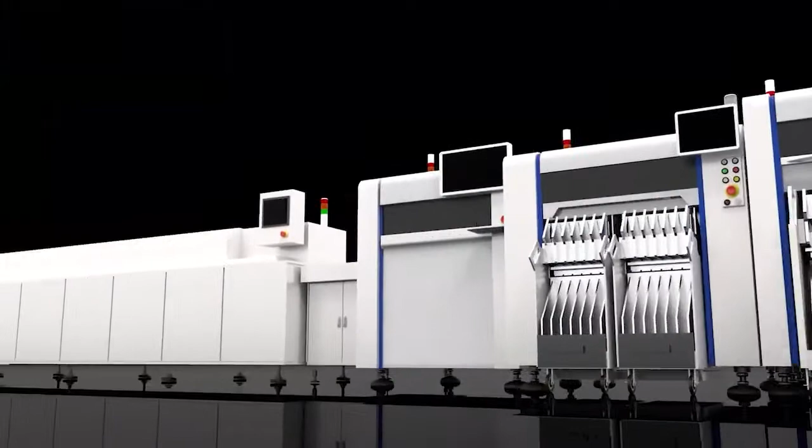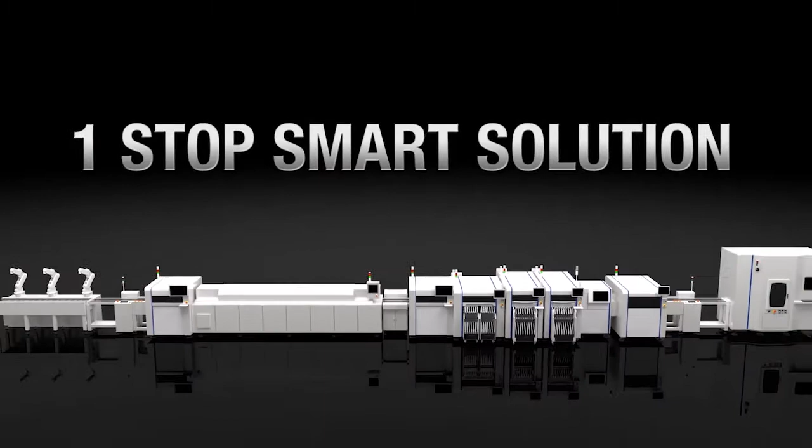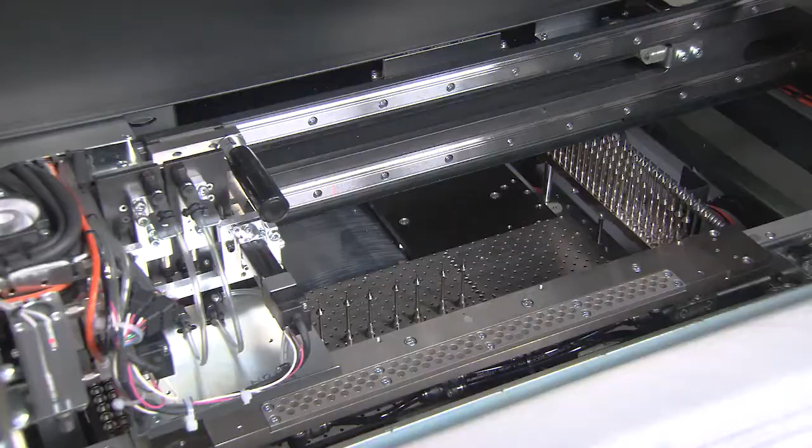YAMAHA One-Stop Smart Solution. This is a concept where Yamaha, as one brand, develops and manufactures products linked to smart, smooth, and sophisticated production lines, incorporating cutting-edge solution technology. This one-stop smart solution is the first concept to integrate the two conditions of all-around development and manufacturing know-how with the major equipment needed for everything in SMT, from printers to mounters to inspection machines, in one complete cycle, along with high performance in each and every machine.

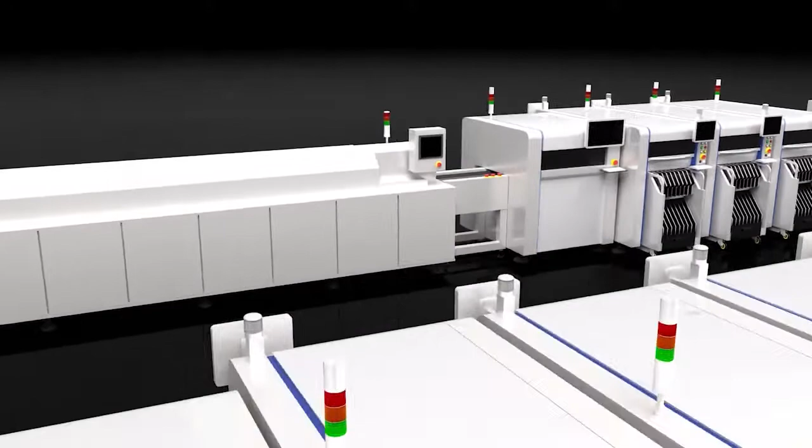Here we introduce you to some typical machines from among the broad Yamaha lineup, fully loaded with intelligent solutions, including the latest technology.

After component refills, we now look at the solder printing process with the Yamaha Premium Printer YSP10. The YSP10 is a high-end printer that delivers high-speed printing on the world's fastest level. The best feature of the YSP10 is fully automated setup changeovers that usually take the most time and trouble in the printing process. To achieve this, we designed and developed 3 new functions.

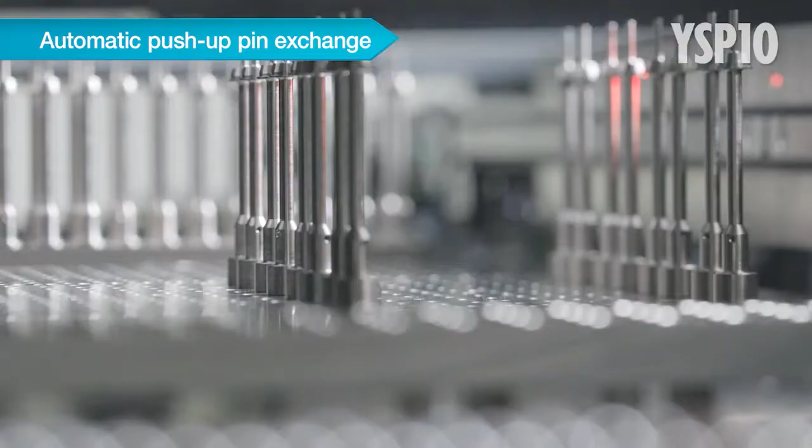Automatic push-up pin exchange. 2 pickup heads speedily place push-up pins at the optimal position.

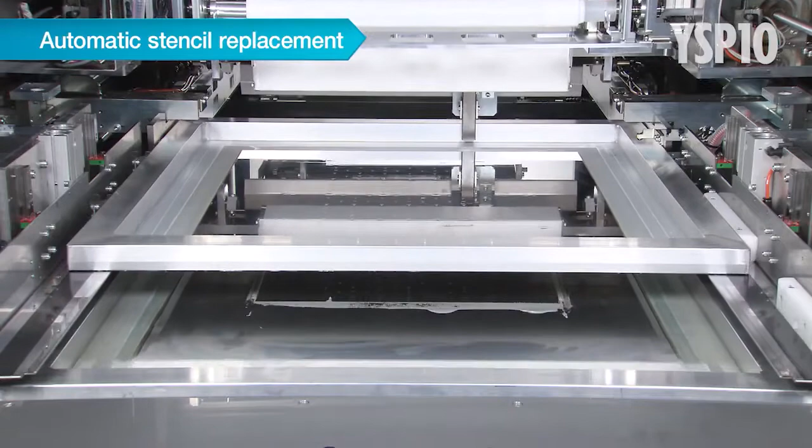Automatic stencil replacement. After presetting the stencil needed for the next production run, the machine automatically replaces the stencil.

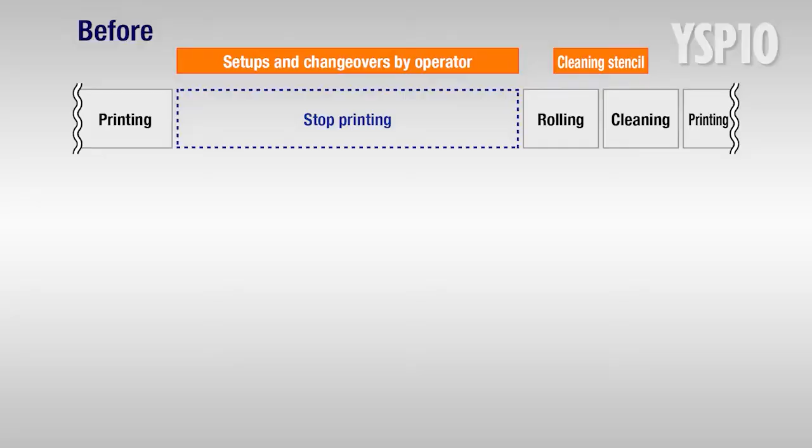Automatic solder transfer. This function automatically scrapes up solder remaining on the used stencil and places it on the new stencil after replacement. These 3 functions, fully automating the setup changeover process, free the operator from this task and shrink the setup time to about 1/3 the time it used to take. The YSP10 is a high-end printer with fully automated setup changeovers, yet also achieves operation to high specs.

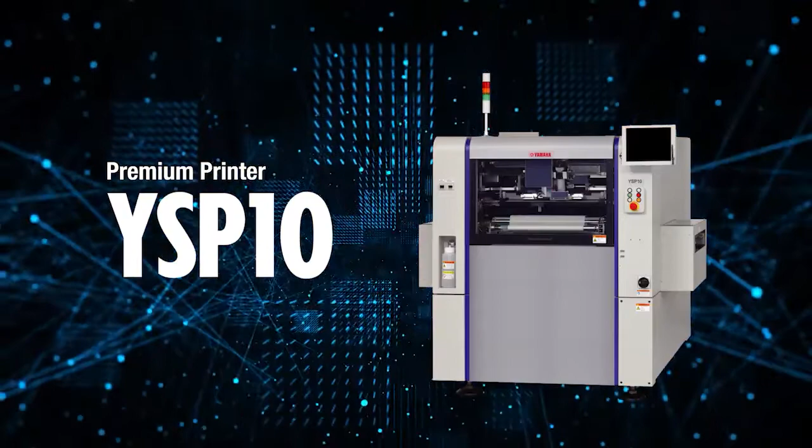After printing, operation proceeds to print inspections. The YSi-SP, a 3D high-speed solder paste inspection machine.

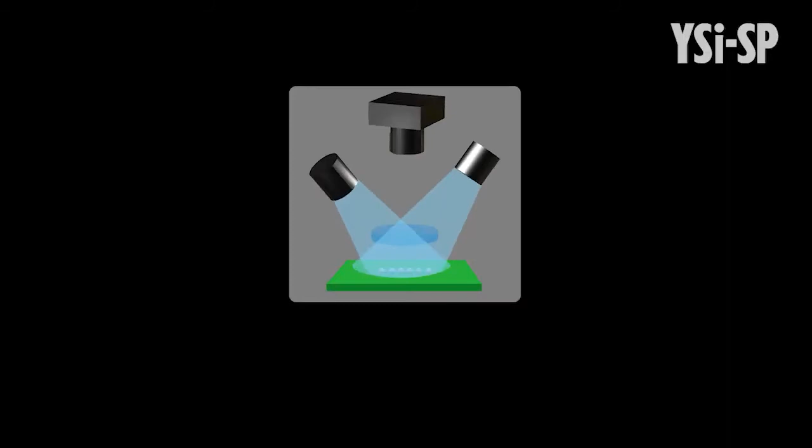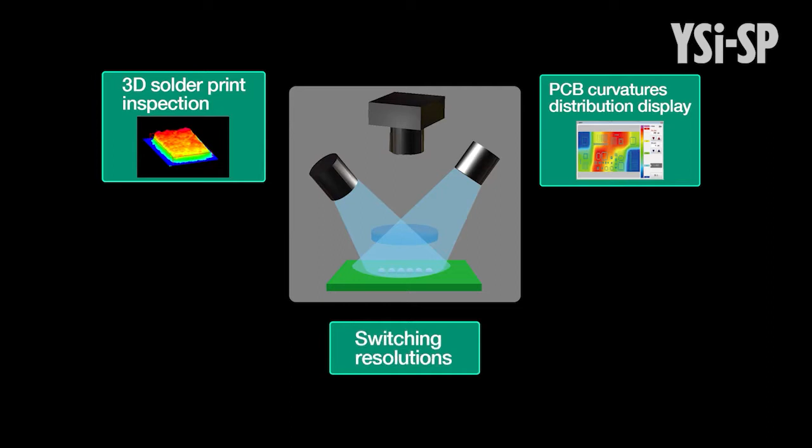The YSi-SP is a versatile device that makes all types of inspections on one unit by using a unique in-house measurement algorithm for high-accuracy inspections, combining both 3D and 2D, as well as super high-resolution technology to switch the machine image resolution. It also handles 3D bonding inspections by way of a data link-up with the YSD Yamaha dispenser,

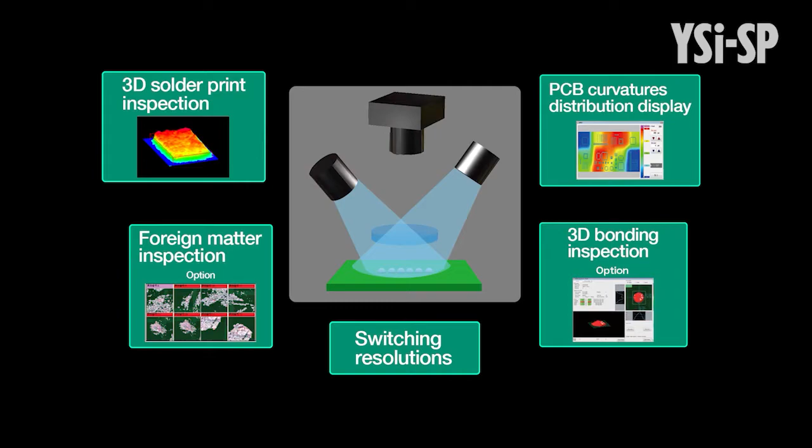and foreign matter inspections as an option. By correctly checking the bond or solder state before component mounting, the YSi-SP helps create a defect-free production line.

Next, let's take a look at the component mounting process. Yamaha mounters are available in a lineup with a host of unique features, allowing you to select the ideal machine to match a wide range of production sites and situations.

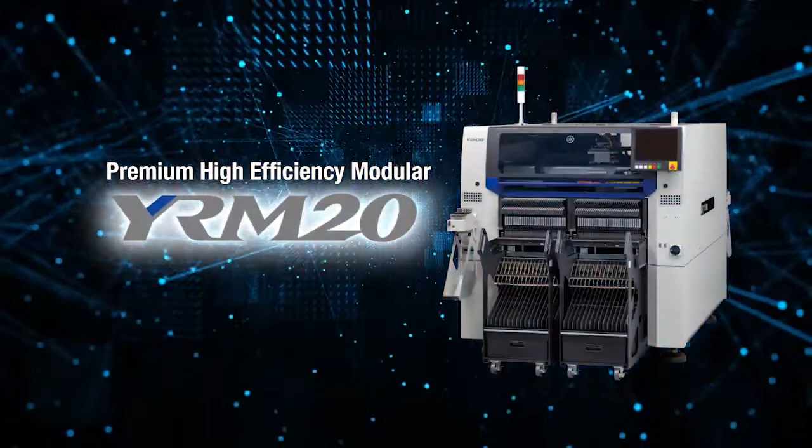Among these, the new premium high-efficiency modular YRM20 serves as the core of the next-generation product lineup. This is an innovative high-speed all-around mounter that represents a new generation fusion of all Yamaha technology. 3 types of heads are available in the YRM20 and are freely usable in all types of combinations.

The super high-speed RM head can produce 115,000 CPH, which is the world's highest level. Combining it with the new type high-speed feeder will achieve unbeatable productivity. Even though it is a rotary head, it is still extremely versatile, handling components ranging from ultra-tiny 0201 mm chips to maximum 12 mm square.

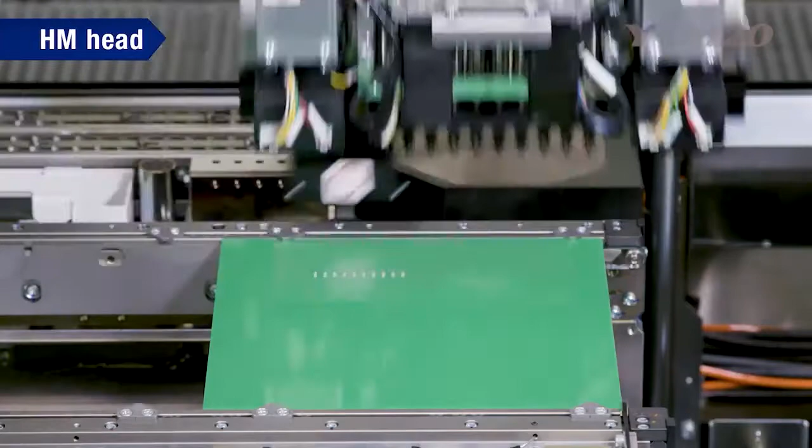The high-speed multi-HM inline head achieves the one-head solution at a very high level. It achieves high-speed mounting of 98,000 CPH, yet handles component sizes from tiny 0201 mm chips on up to sizes of 55 by 100 mm.

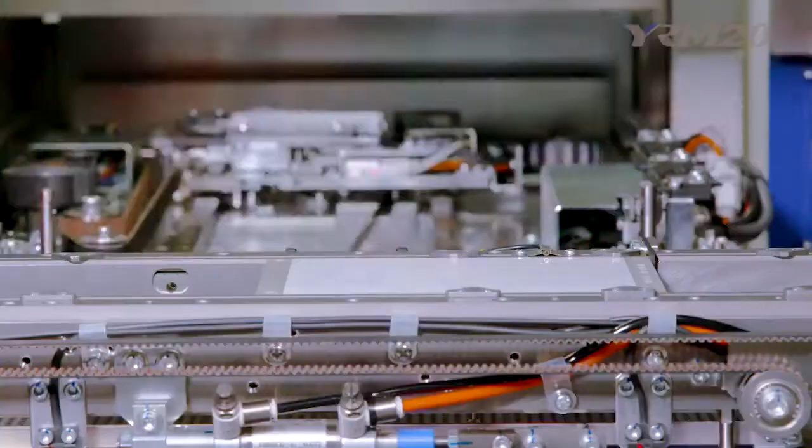The inline FM head for odd-shaped components emphasizes component compatibility even further, proving ideal for tall components and other large components.

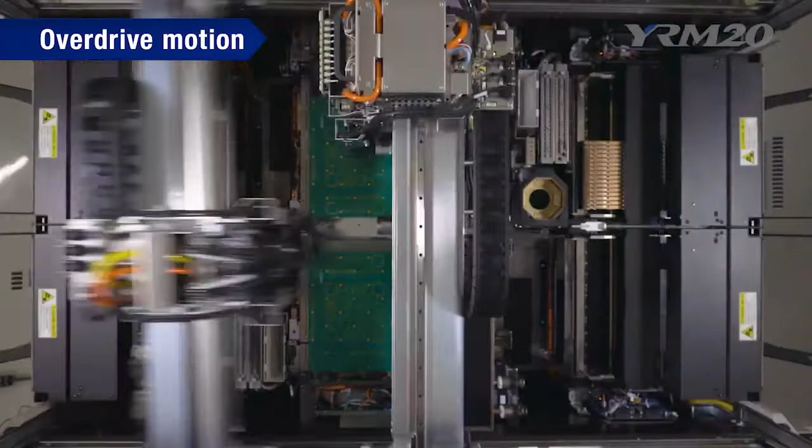Also, overdrive motion that inherits the Sigma series technology has reduced restrictions when 2 opposing heads enter each other's space, improving actual productivity.

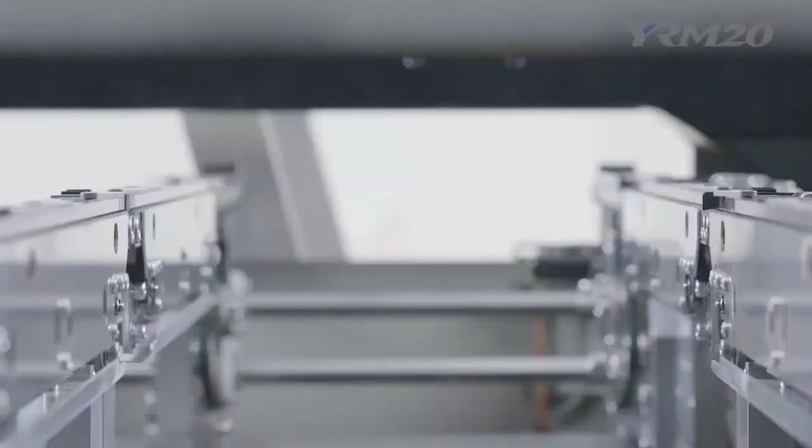Use of a new type of component recognition camera has boosted recognition speed and quality to a whole new level. A newly designed X-beam reduces warping from thermal stress to a minimum to achieve high accuracy mounting to plus or minus 25 micrometers. The newly designed conveyor optimizes the layout and delivers high-speed conveying.

Time needed for PCB changeovers is drastically reduced. As a result, the effective production takt time has been greatly improved. It can now also handle a broader range of PCB to a maximum size of 510 millimeters in width.

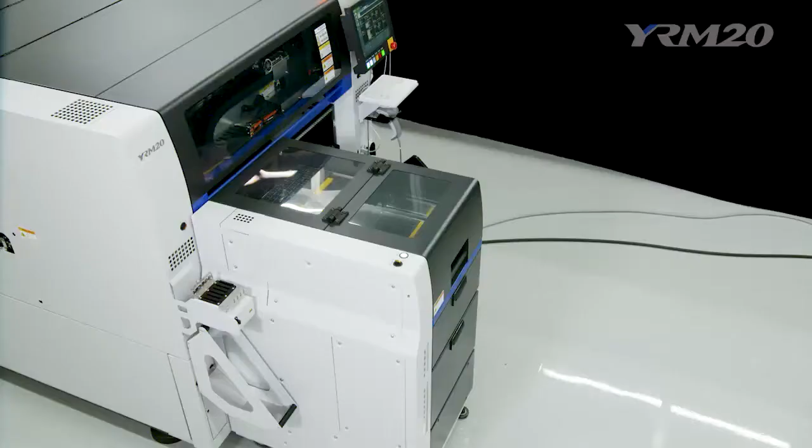Moreover, the recently developed non-stop automatic tray supplier eATS30 supports YRM20 by speedy non-stop supply of trays. It provides non-stop supply of tray components in pallet or magazine units.

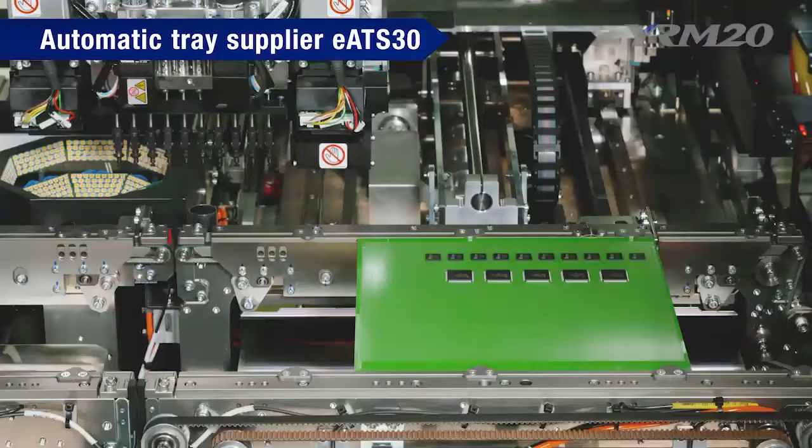Components on trays can now be efficiently supplied without having to stop production. This means fast tray replacement and minimal loss of production time.

An innovative next-generation mounter that integrates all of Yamaha technology with a completely new platform. The new premium high-efficiency modular YRM20.

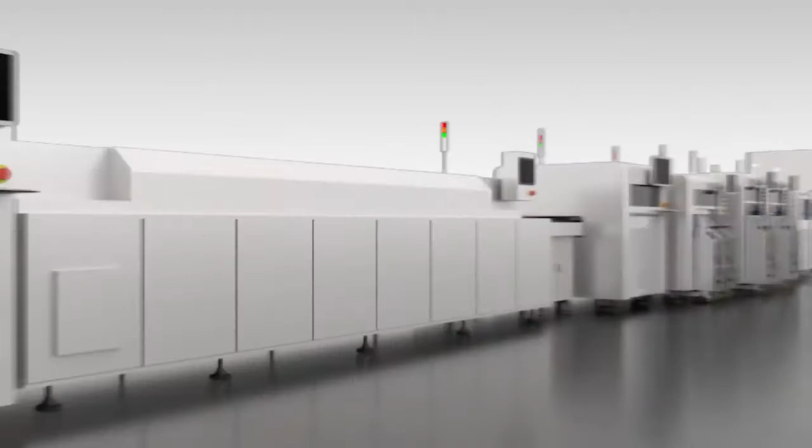Next is the YSi-V 3D Hybrid Optical Inspection System.

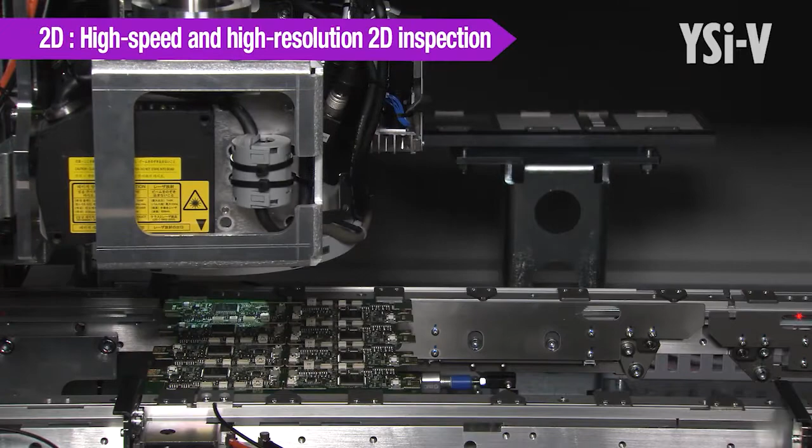This high-accuracy inspection device can make 3 types of inspections: 2D and 3D inspections, and 4-angle camera inspections, all by 1 unit. High-speed, high-resolution 2D optical inspections via an industrial-grade high-resolution camera and high-speed image processing. Optical phase shift 3D inspections detect height and tilted surfaces. The 4-angle camera detects tilt angles which are not visible from directly above.

The YSi-V achieves the fastest level of inspection speed in the industry, along with accurate quality judgments by a combination of many functions and features. These devices and concepts all work together to provide Yamaha's one-stop smart solution line, where all of these high-spec machines interact with each other to a high degree without a black box, integrated by the IoT M2M integration system, Intelligent Factory.

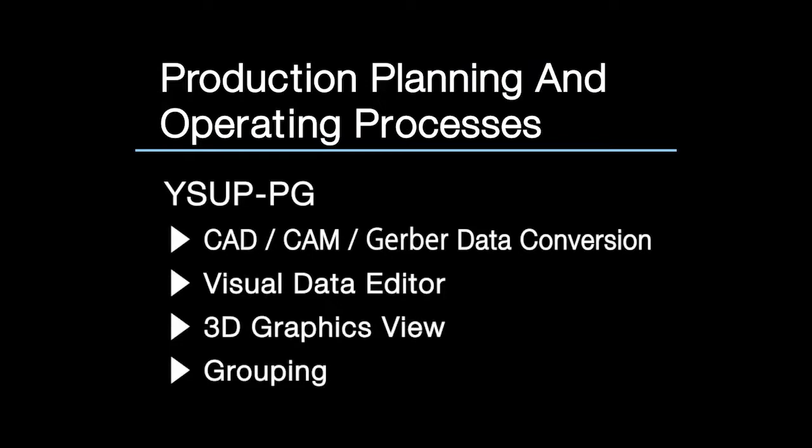Now let's take a look at its software. First, we have the software YSUP-PG that supports production planning and operating processes. In YSUP-PG, the user interface was completely redesigned and recreated, much easier to use and operate, and drastically boosts work efficiency.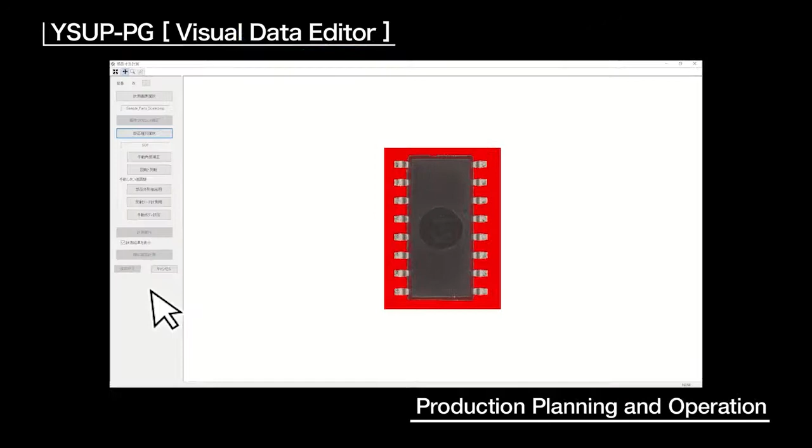CAD, CAM, Gerber data conversion. It not only converts ASCII-type CAD data, but also converts standard CAM data to component mounting data. Visual Data Editor displays images created from standard CAM data and Gerber data so that component mounting positions and mounting angles can be confirmed in advance. It can also automatically measure component dimensions from the actual component image.

The 3D graphics view gives the operator an accurate look at possible component interference, component mounting coordinates, and other important items to further enhance the quality of the PCB data.

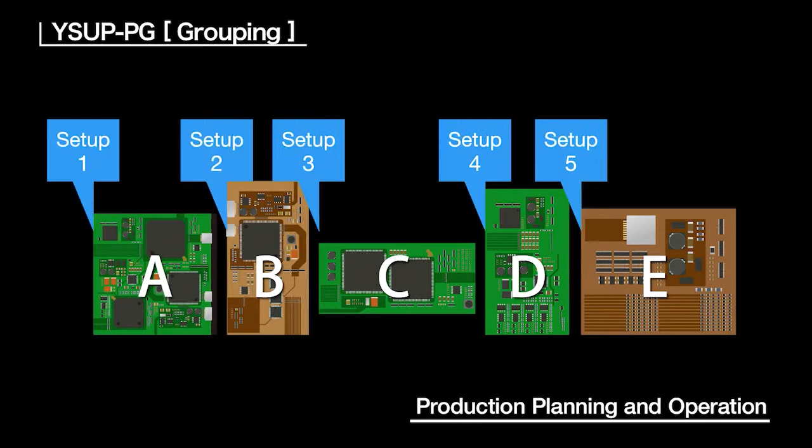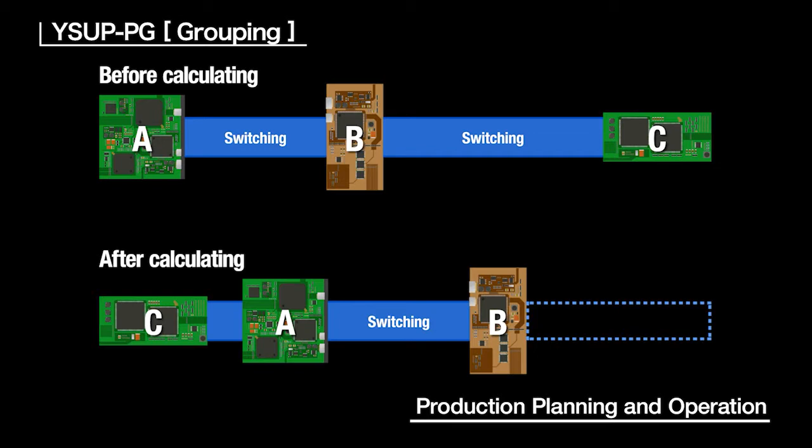Grouping: this software automatically calculates combinations of products with many common component combinations in a production line and sets a no-waste production priority. In addition, taking into consideration the switching time for temperature profile change in the reflow process, the most efficient order can be calculated. This software minimizes setup and changeover time, along with standby time, to boost productivity and task efficiency. It also supports dual-lane production.

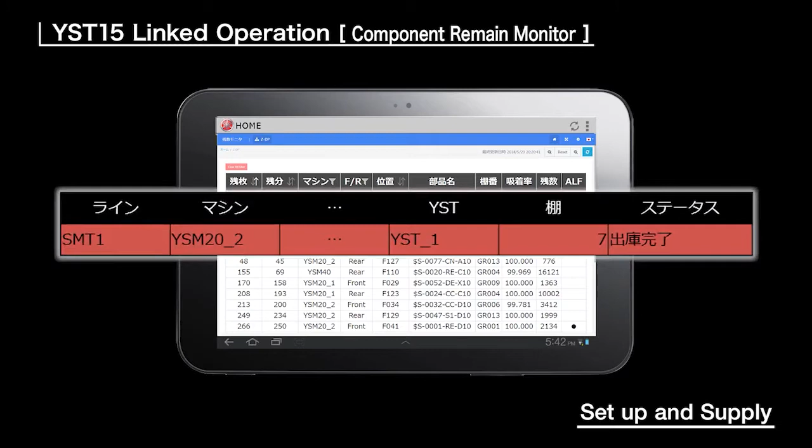Next is software for component setups and changeovers and supply processes. YST15 Linked Operation Component Remain Monitor: this software monitors component remaining information on a smartphone or tablet, so the required component supply timing can be found from remote locations. Batch Supply Software.

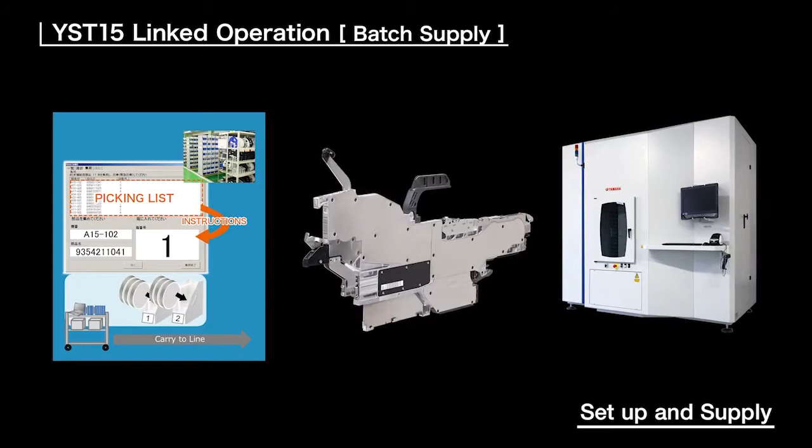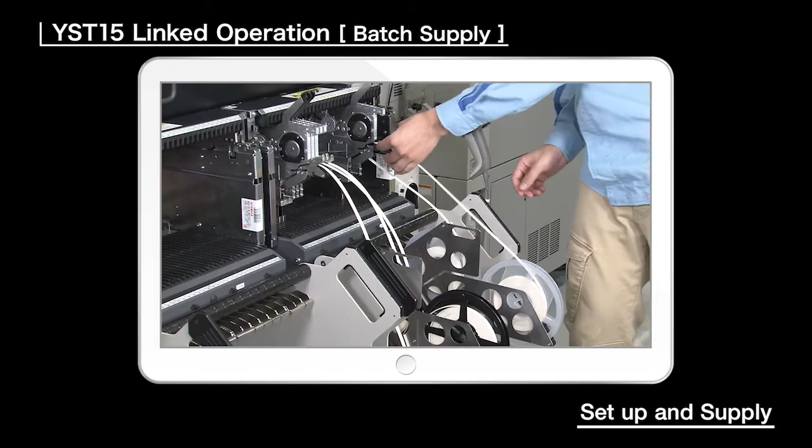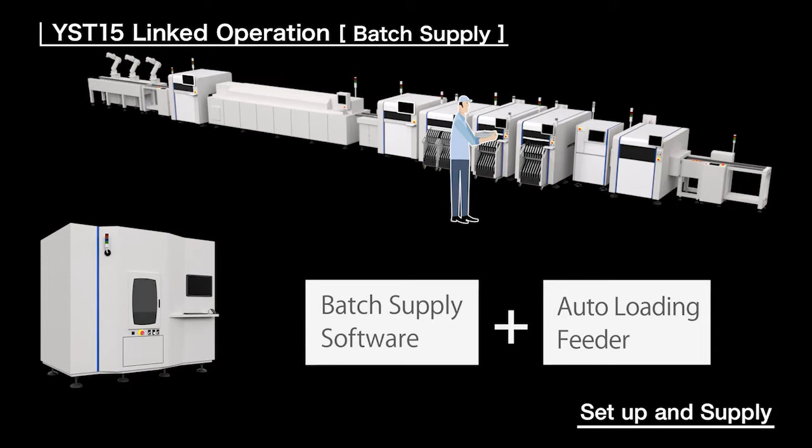Using the YST15 along with batch supply software and an auto-loading feeder capable of presetting the next reel means that supply components needed to be loaded by the operator can be retrieved from stock in one batch, so components can be supplied in one batch without having to stop the machine. The operator no longer has to constantly walk around checking on the machines, so work efficiency is boosted to a whole new level. Moreover, linking operation to an AGV automatically transports the components to the requested work location.

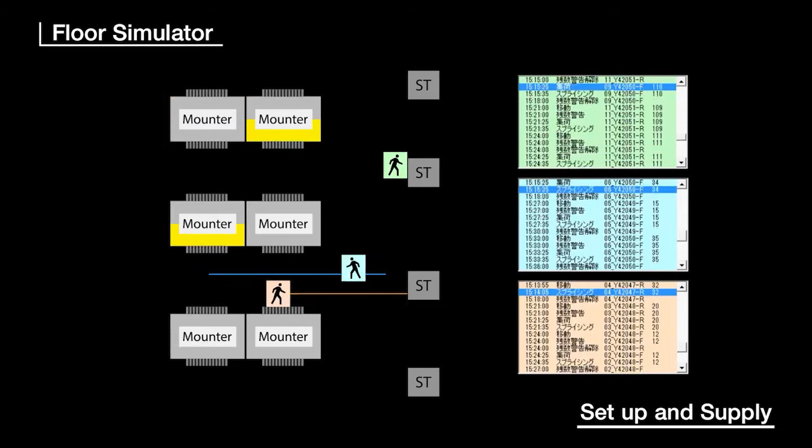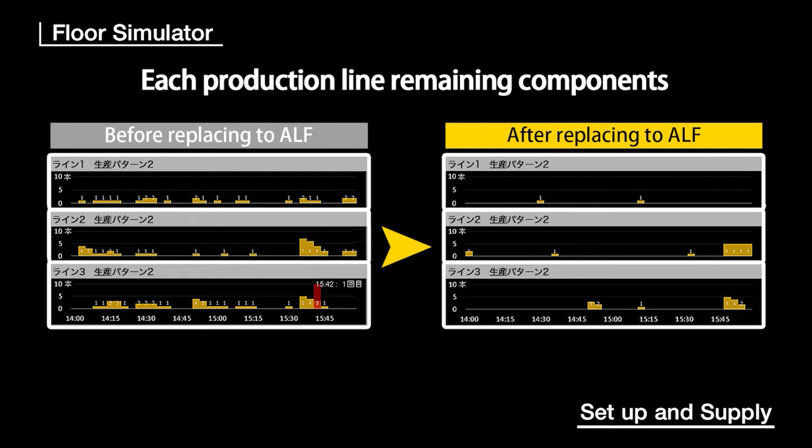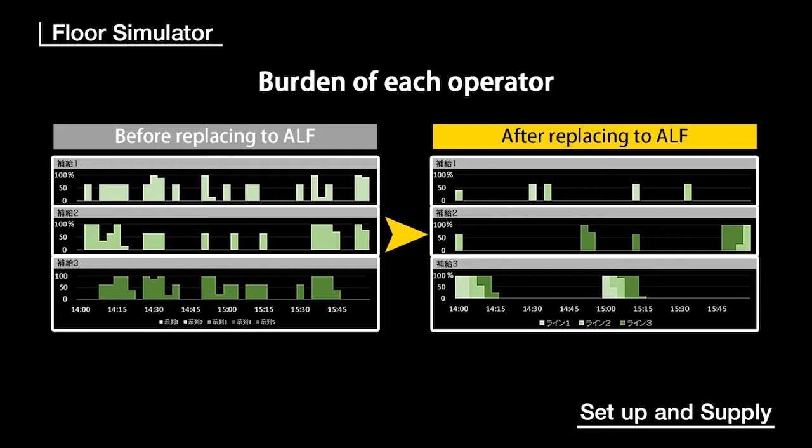Floor Simulator: this software simulates how much effect would be achieved by replacing the current tape feeder with an auto-loading feeder. This is also aimed at cost effectiveness, since you can easily estimate the optimal number of auto-loading feeders to substitute for your current feeders. You can also give effective work instructions, since you can check the information of which machine is waiting to be supplied, or the burden of each operator, at a glance.

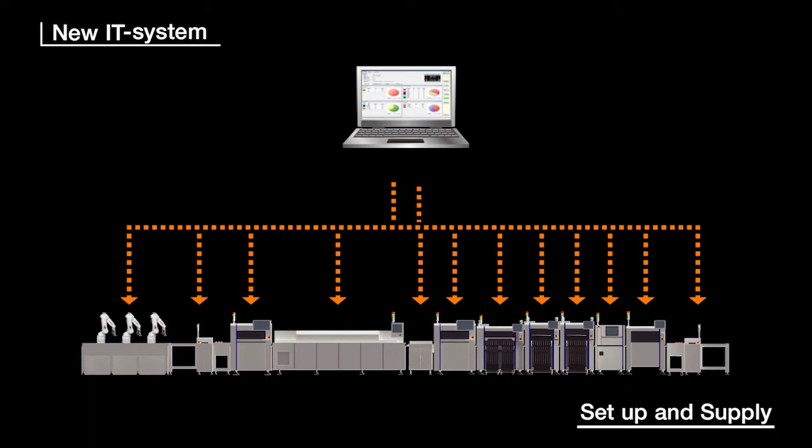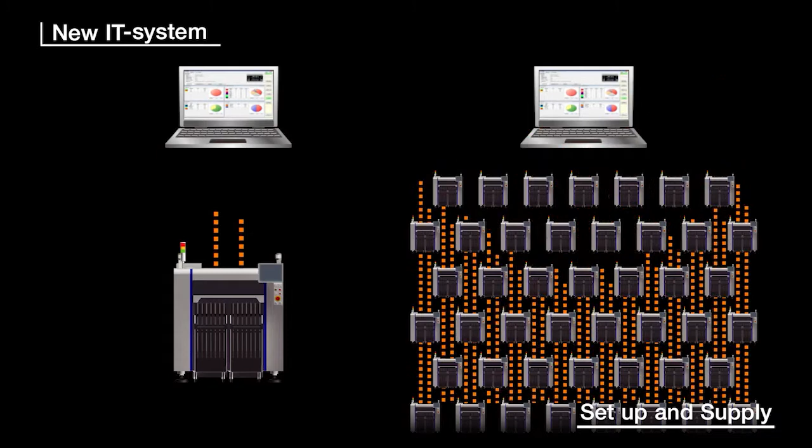New IT system: this system provides central management of information on material and components for the entire floor and serves as a base system for utilizing the function of various options. It ensures high-speed response in real time, giving the same quick response regardless of whether it is linked to one machine or 100 machines. Also, it gives stable, reliable connections with peripheral devices and upper layer or host systems.

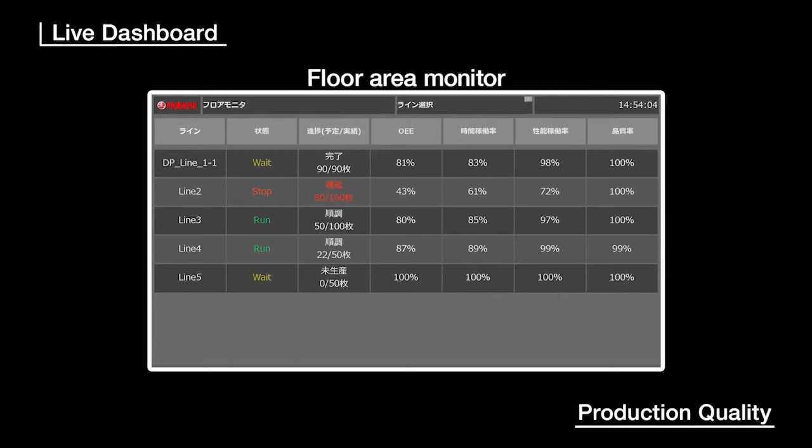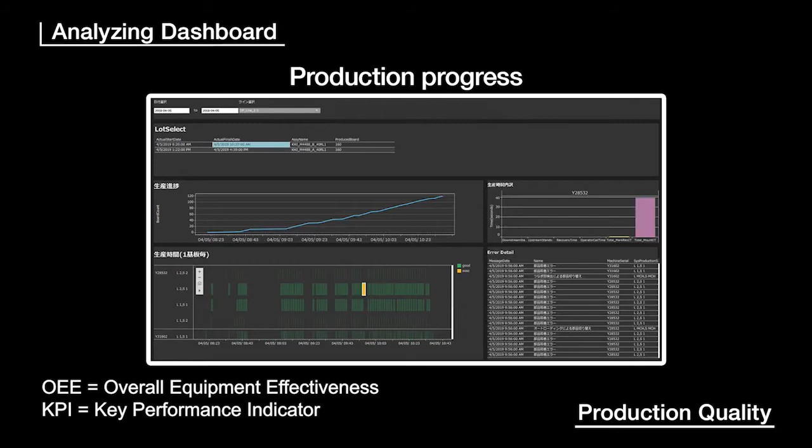Next, we take a look at software that helps maintain quality. Live Dashboard: here you can monitor the production status of the entire floor area and each production line in real time. Analyzing Dashboard assists in analyzing trouble issues by showing production progress and records, OEE and KPI, all in a visually easy to see and understand display.

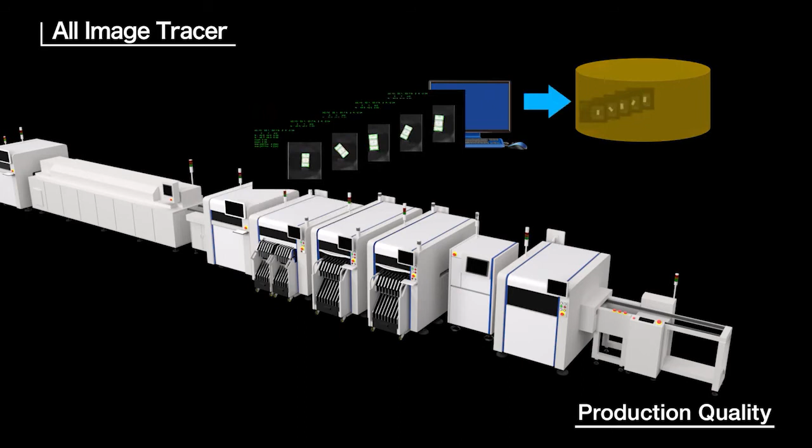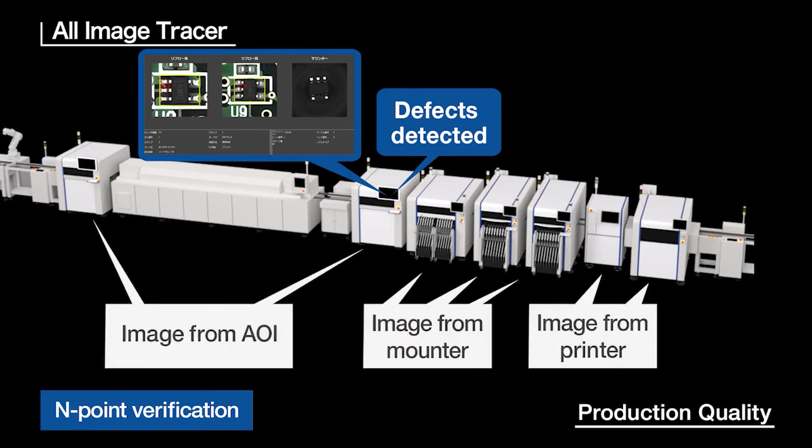All Image Tracer: this software saves all component recognition images from the mounters with no tact loss. The viewer application can easily search for the target image from among several million or more images to swiftly pinpoint causes of defects. The stored images are linked with N-point verification and utilize external inspection results from before and after reflow to link information against related printer and mounter images to swiftly pinpoint causes of defects at NG mounting points.

The Yamaha Intelligent Factory brings both automation and manpower savings to the worksite through the one-stop smart solution concept. It provides the vital support essential for smart manufacturing.

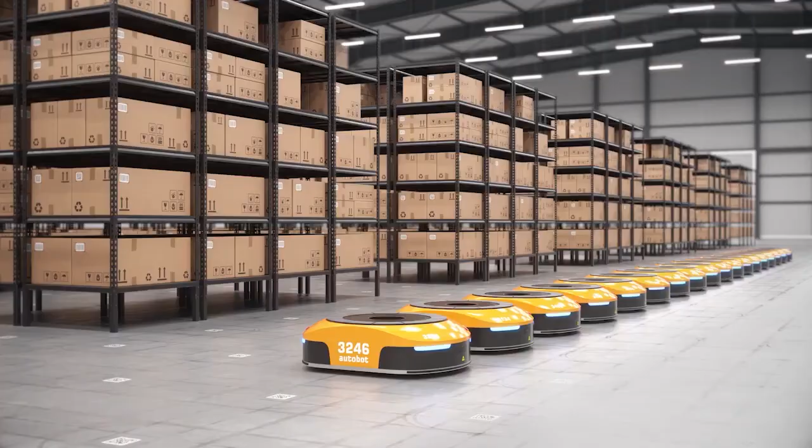Finding security and happiness for humanity in our super rapidly changing world means making further progress in the world of electronics. Cutting-edge surface mount technology via the one-stop smart solution is the key to supporting these technical advances. Yamaha contributes to the future world of electronics through robotics.